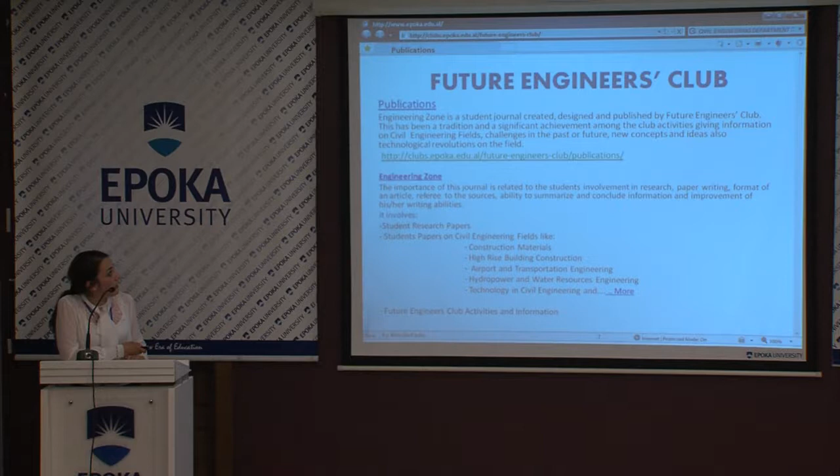Our club, as Professor Erjon said, was born with the university and the department. But we had a timeout, and we want to re-initiate it. Before, there were two other journals published. The first was the Engineering Zone, published in 2011, focused on the Millau Viaduct, the world's highest bridge. The Engineering Zone number 2, published on the 2nd of May 2011, concludes more about Albania, making the first move of Albania today, Albania tomorrow.

The one you're holding in your hands is Engineering Zone number 3. We tried to focus on every single aspect of civil engineering, with our main focus on hydropower and energy engineering, which is the Hoover Dam, a concrete masterpiece.

These are parts from the Civil Engineering Zone number 1. I'll show you what we include: bridge structure, student papers, and this is what I expect from each member. All of you who have papers and want to publish, please send them. I'm going to tell you the contacts.

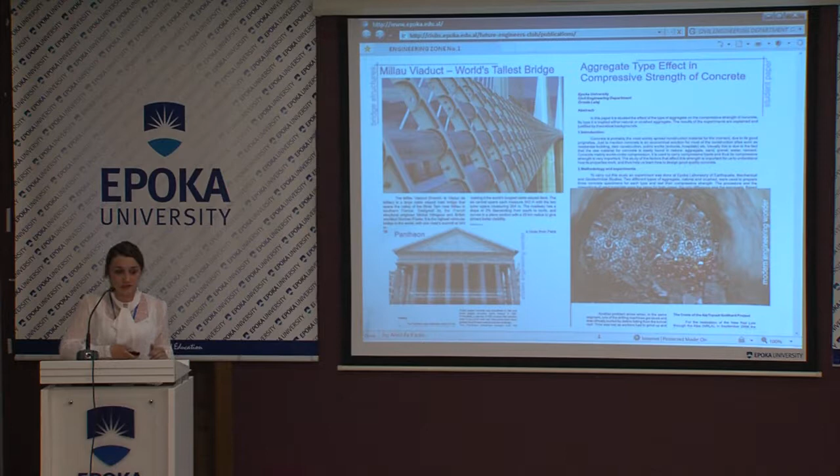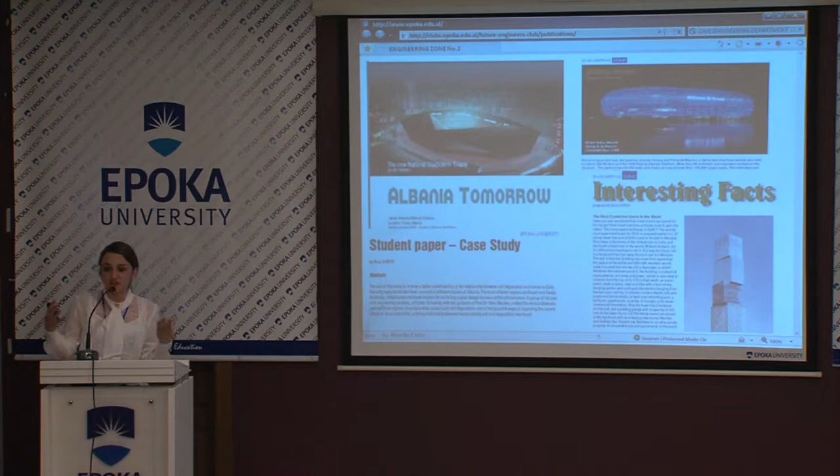This is the Engineering Zone number 1, and these are parts from Engineering Zone number 2, which included more about Albania, Albania tomorrow, a student paper case study, interesting facts about the civil engineering world and technologies involved, and also stadiums—everyone loves football, right? So let's include something that makes you feel better, is funny, and also teaches you about engineering.

The one you're holding is the third one. This is the cover, here are the contents. In this number you will find ancient engineering. Sometimes each of us, even human beings, need to know where they have been, to know where they are, and where they're going. So what about ancient engineering?

We took the example of Pont du Gard, the Roman Empire's strongest masterpiece. After that we had the bridge structure—this bridge is very beautiful because it's Europe's largest water bridge. So on the bridge there are not only human paths, cars and automobiles, but also boats, rivers and water. So how to achieve this? This is also very important.

Transportation engineering—we want to spread out transportation. How is it implemented in the world? Why is it so important? In Albania, maybe it's needed, but it's not given the right attention. So what about this one?

We also included Kansai International Airport, an airport built in the sea on an artificial island. In Japan there are earthquakes, right? So how did engineers manage this one? And the world's best airports, according to Airports Council International—maybe you would like to check out who those airports are.

Which are these airports? Tunnel engineering, where tunnels are becoming even more important. We included the largest tunnel—it's in Norway, the world's largest tunnel, 24.5 kilometers, taking first place for the world's largest tunnel. Also, we have the Channel Tunnel, the masterpiece of Europe, let's just say.

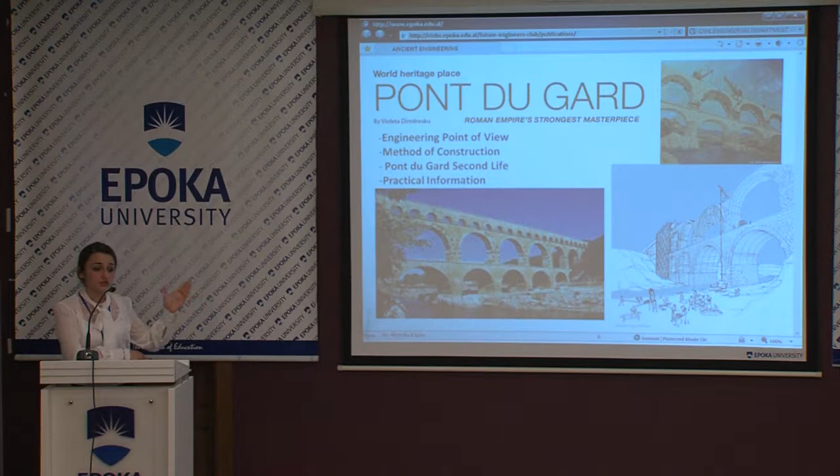As I said, we have the Pont du Gard. It is seen from the engineering point of view, the method of construction, Pont du Gard Second Life, and practical information that you will find in the magazine.

After that, as I said, the Magdeburg water bridge is Europe's largest water bridge. You will see the technical specifications, some of them, how it is used, how it has been built, what is incorporated in it. Also, Kansai International Airport is an airport built in the sea.

Well, it looks like they had no terrain to build an airport, so a new idea: let's build it on an island, an artificial island. This is one of the largest airports in Japan, and one of the largest in the world.

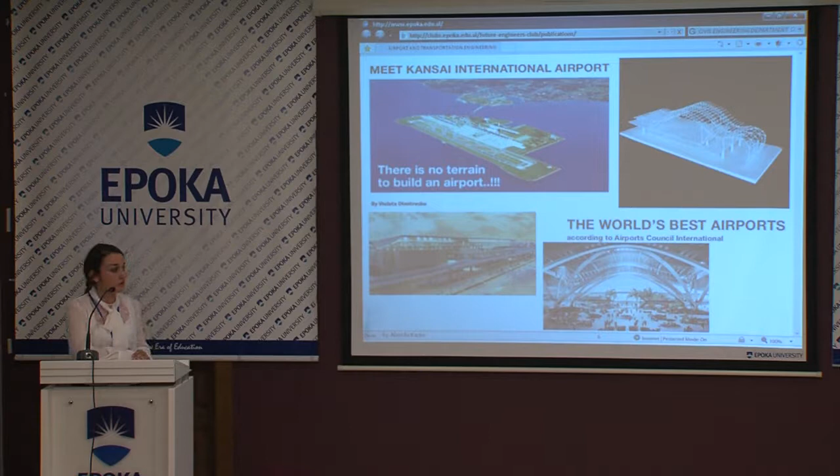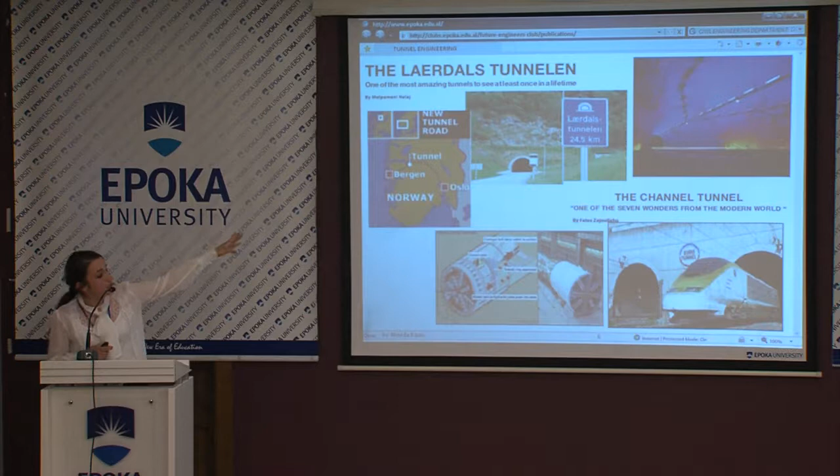After that is the largest tunnel, one of the longest tunnels in the world, and one of the best tunnels having the best air condition among its environment in the whole world. So what about this challenge? As you see, Bergen city and Oslo have been merged, or incorporated, using this tunnel. How about it? We wanted to explain or show how much you can benefit from it.

After that, we have the Hoover Dam. As I said, it is all built of concrete, a concrete masterpiece. You will find how difficult it was, but also some management tricks. The manager of this one scheduled and finished it 2 years before the deadline, which is crazy, but it happened. So how did this happen? We explained all of it.

And after that, we wanted to include something very important for the Balkan part and also for Albania. We had the pleasure of having engineer Andi Dukain here to explain the Trans Adriatic Pipeline, and I wanted to include all the information in the engineering zone.

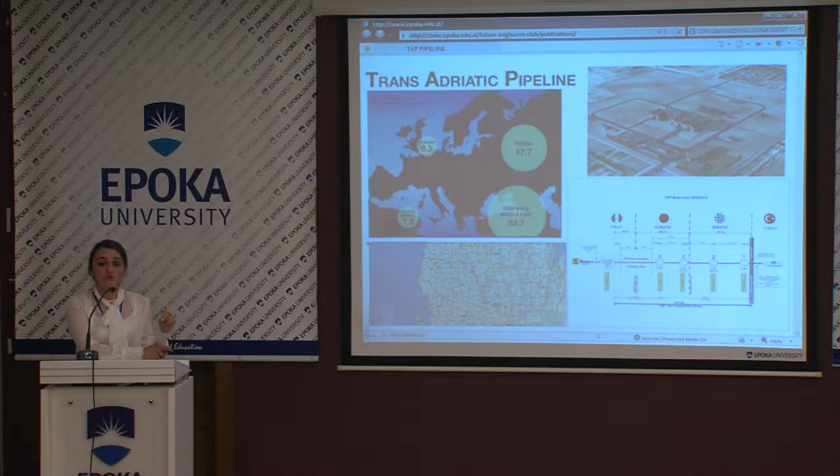Also, you will find another student paper, Recycling of Concrete. It's very important for us not only to show student papers and research, but also how to use references, how to cite sources. This is very important. In this case, we are also fighting against plagiarizing.

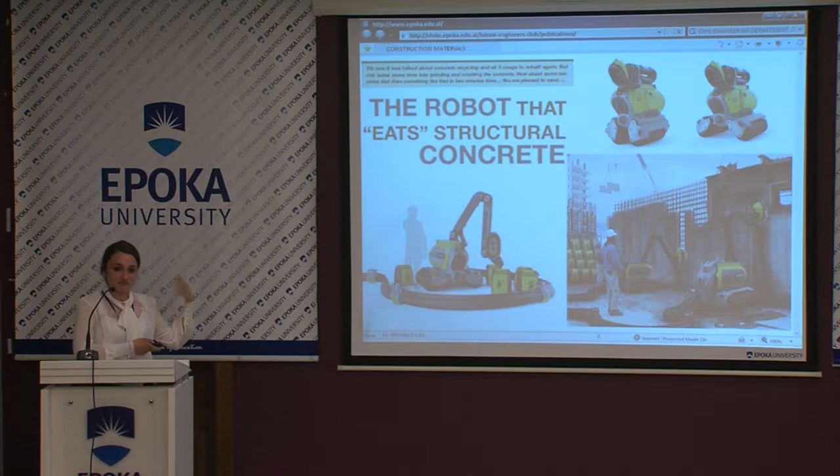After that, you will have construction materials. These, I must say, are research made by students. All of this is research made by students. You will find a few examples which are taken or summarized.

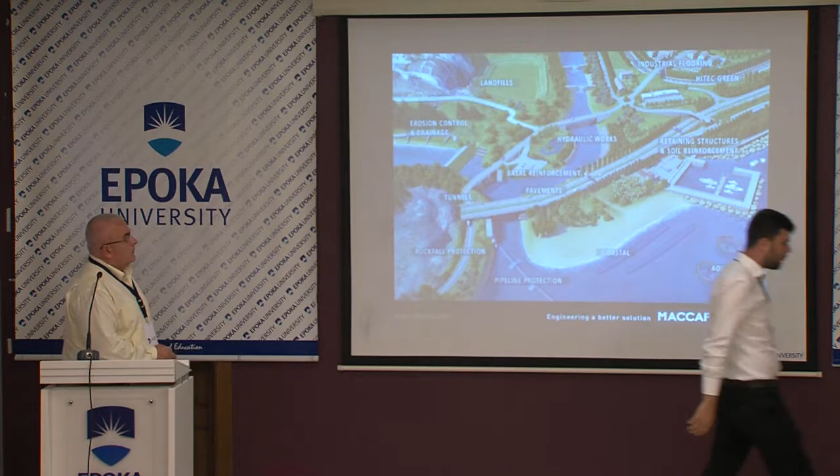I hope... the right one or the left one? The right one. Okay, so actually Maccaferri Group is a worldwide distributed group, specialized for geotechnical products, in particular for environmental solutions.

Our motto is very simple, let's say, well familiar and so well fitting with your motto, which is 'engineering a better future' - 'engineering a better solution' is ours. For you as young engineers, you have to have the challenge to engineer a better solution, also as we do.

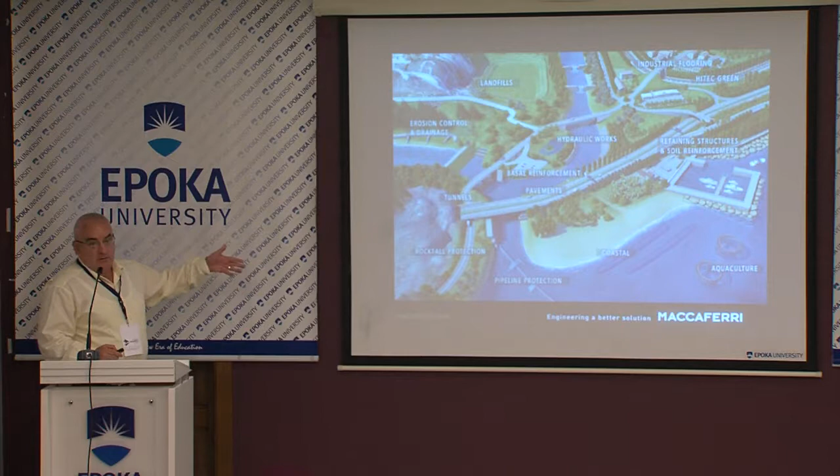Actually, we are distributed in many solutions, as you can see. So landfills, I'm starting with the latest step, because landfills is the challenge for the future of the country. We are living in Albania, and we see that the environment is one of the most problematic issues, because we have a beautiful country, but we have less attention to protect this beauty. At the same time, we have to think about recycling, as I heard here that you have already made some investigation on recycling. And landfills are very important for us, to be designed to be also supplied by our materials.

Of course, one of the problematics that you can hear frequently is erosion control. Erosion control is one of the most important issues, actually, knowing and having consideration of the geology of the country. Albania has a very specific situation for geology, having very common views and cases with the other part, which is Italy, South Italy specifically, and surrounding countries.

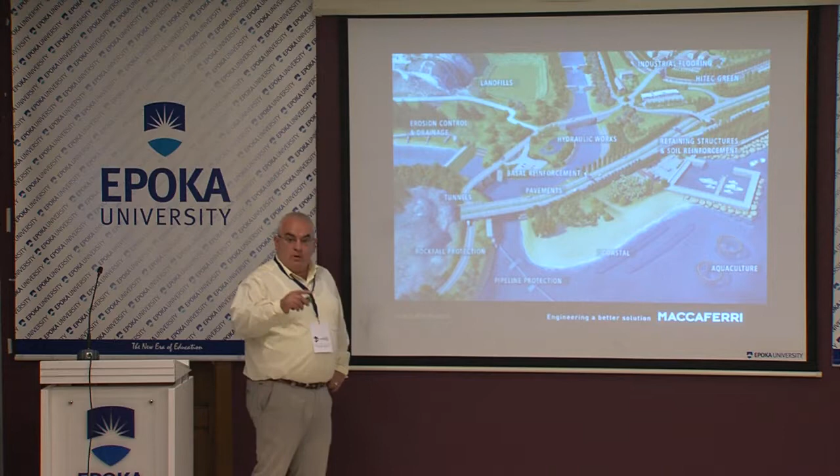For the pipelines, it's the new issue that we have to see for the future. In specific case, we have the new pipeline of gas passing through Albania, which is the TAP project. And with the TAP project, I think we have the case to work together and also to explain our materials together.

Of course, to give a solution is important, but on the other hand, you need materials that you will be able to test, verify, and prove to convince the market. This is a very important issue, because you are engineers. Maybe you are already starting to produce papers, to design something, to put your ideas forward. But the important thing is to test what you are designing, what you are suggesting. So behind all the solutions, there are materials and there are tests.

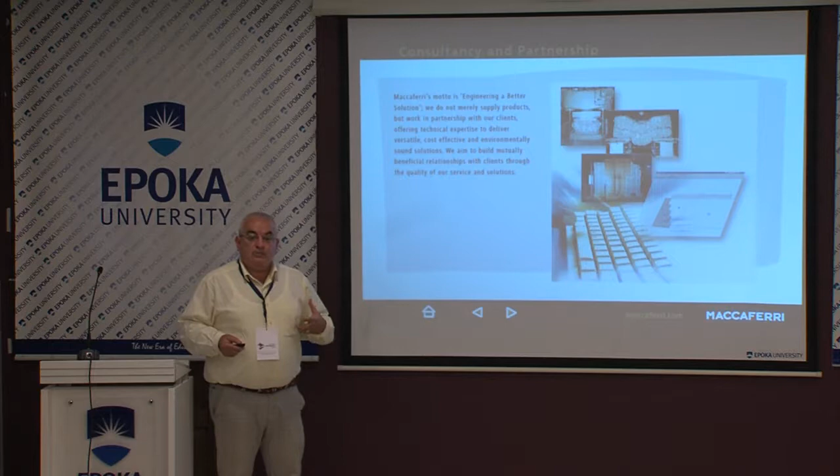Of course, developing solutions, you must also develop the software, making this solution accessible to everybody, to every engineer. The basic product is the gabion. Basic, I mean the oldest one.

Gabion is used with the meaning of a cage filled by natural materials since Roman times. At that time steel itself did not exist, but they were using ropes or environmental materials to create cages, just to use in nature to prevent sliding areas and also to create embankments, according to the situation at that time.

But Maccaferri was the pioneer to develop this old idea, bringing it through history from Roman times to a modern product made of steel, which is very high quality steel, and also elaborated and protected against corrosion, which is very important for the long lasting of the product.

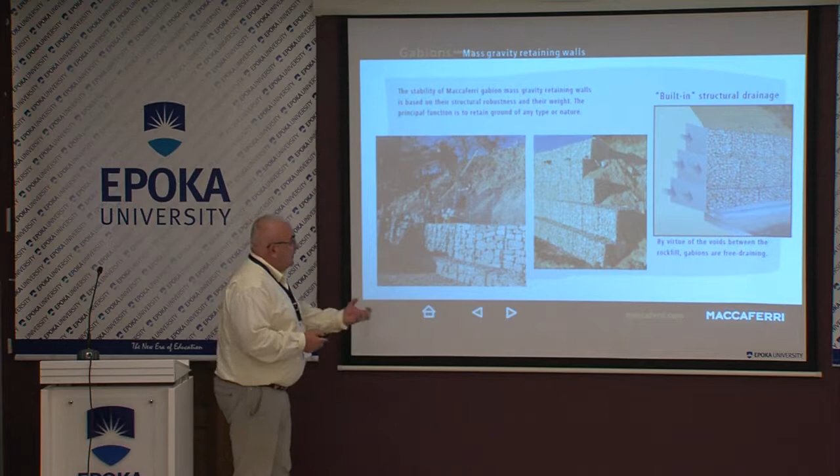Anyway, I don't want to take more time, because I think it is foreseen that after this workshop there will be a kind of exhibition showing how a gabion is made, how it will be filled, and how it will be constructed. Two workers are coming from our side to show you, to make it possible to have a real impact on this product.

I said that it's important to have the solution from an engineering point of view, but also to have a full and deep study about the materials. Materials have to be at the maximum level that science can achieve in the current situation. So actually we are developing raw materials based on the conditions where they are applied.

For instance, the raw material we use is steel wire. It is made of steel having a balance between three characteristics: to be plastic enough to be elaborated, to have the right resistance and strength when forces are applied to the structure, and at the same time to be elastic enough to have the flexibility needed so the structure does not break down.

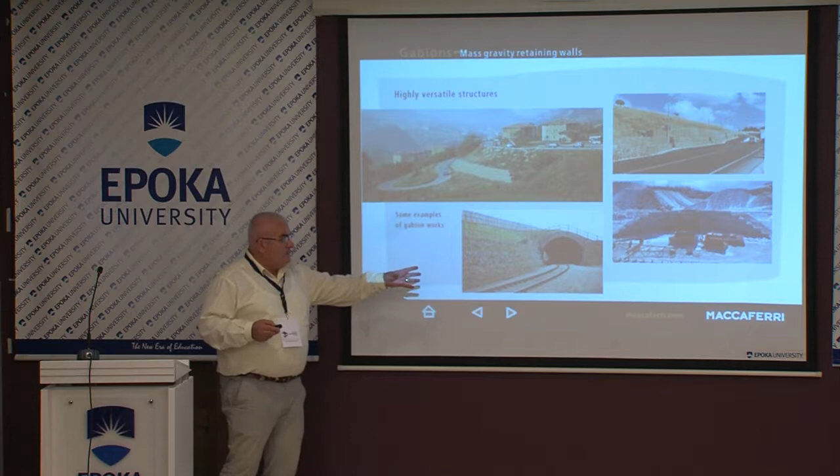So as you can see, gabions can be used almost everywhere in the environment: in infrastructure, in river protection, in railways, in roads, also in retaining walls, having on top a very important structure like a building.

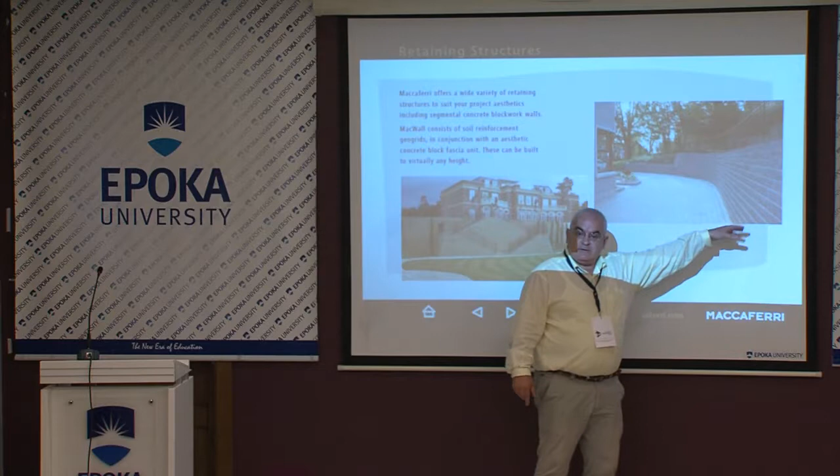We have later on developed structures that can fit with architectural solutions, because on one hand you use them for infrastructure, but it's also important to make your living area nice. Just a few days ago, I saw a documentary on German TV where a German family was shown building such a wall inside their house - they purchased these cages, these gabions, on the market.

You are very privileged because you have the factory just a few hundred meters away from here, so you can buy a few cages. You can do it yourself, for fun, in your home. And in Germany, I verified, because I worked there for a few years, that it is really fun to do something.

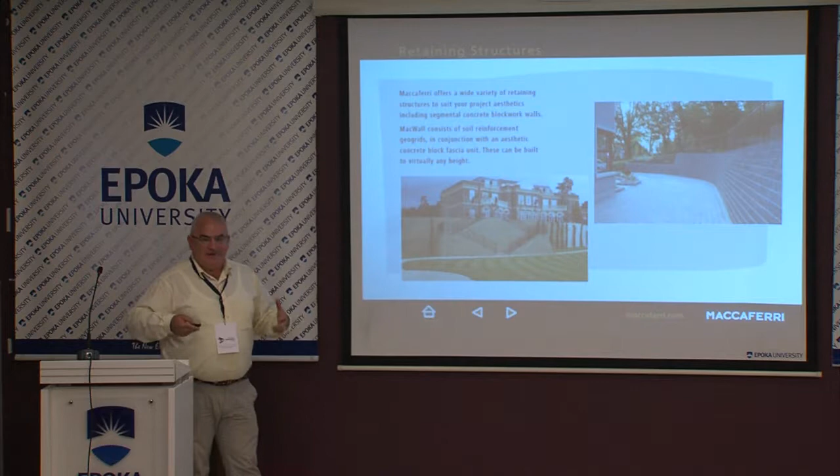In specific cases, engineers, young and old, like to do something in their garden, their house, their environment, their neighborhood. This makes their weekends or days off exciting. This is a way you treat not only your knowledge but also your free time.

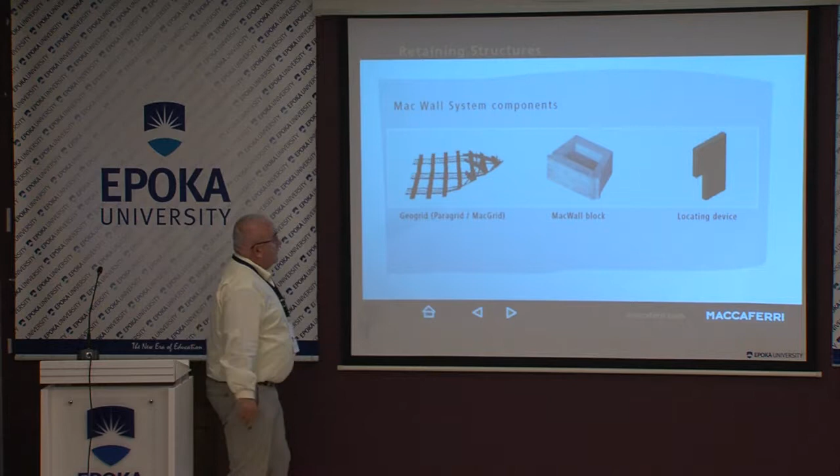Of course, the conditions of construction change over time, and more specific inquiries need to be solved, meaning retaining structures not only by simple gabions but combined with reinforcement. At this point, the idea was developed to have structures where gabions are used in the front, and reinforcement on the backside, respecting the environment by reusing materials available at the site.

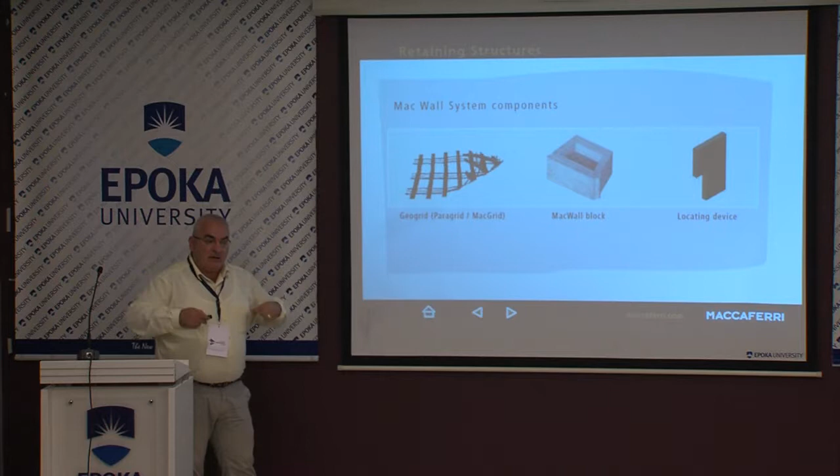So you excavate. If you have good material, you keep it on site, and when you construct, instead of using other materials, you reuse or recycle the material you have already excavated. This is the meaning of doing such kind of big structure.

I have friends who work on site. We fight on site, you know, with these kinds of structures, like 40-meter high retaining structures. That was something amazing, also in Europe, but we have done it here in Albania. These are made by a reinforcement soil system, which contains the Terramesh, our developed product, plus the geogrids on the backside.

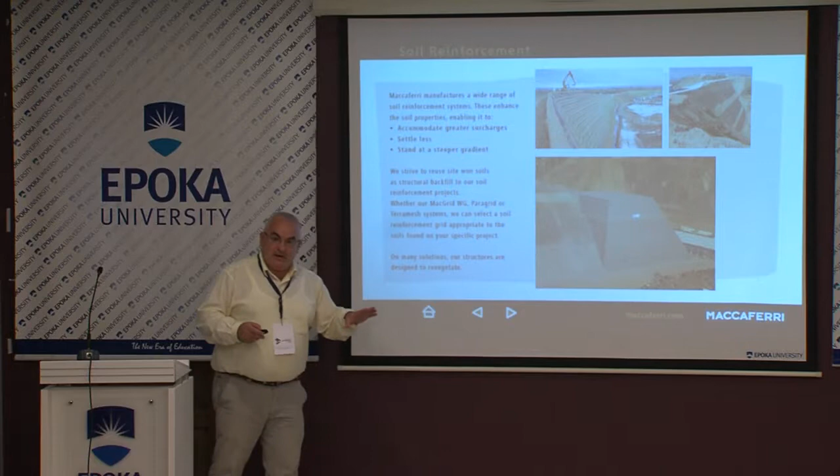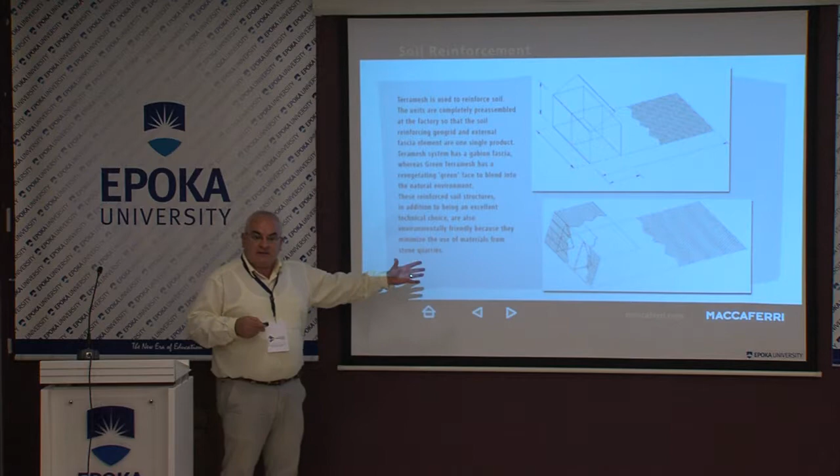Of course, this is a combined solution, and you need as a backup not only the design, not only the product, but also this knowledge distributed to all engineers, to be, as the Italians say, 'pane quotidiano', the daily bread for every engineer. It's important that everyone has access to the right software, not only for testing but for constructing, designing a structure like that, and dimensioning it.

You can see we have colleagues here who participated in this construction. This is in Albania, about 39-40 meters high. And this one is in Greece. We worked in cooperation with Aktor, already established in the market, and we're still working not only in Albania but all over the area: Serbia, Macedonia. Actually, we are involved in Qatar on a big project.

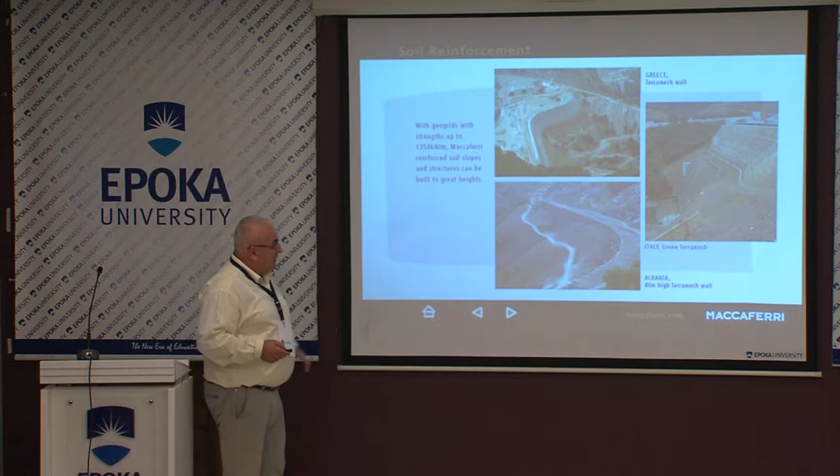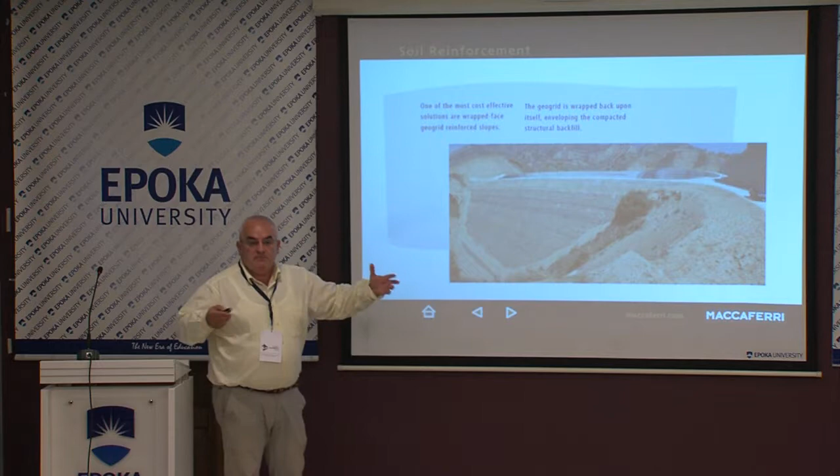Dams, you know - unbelievable to say that with these structures, soil reinforced structures, you can build big, high dams while respecting the environment. This is very important, by the way.

Also, reinforced soil can be used inside urban areas, using concrete as facing, in order to give a nice facade, while using compacted soil inside, reinforced by specific geogrids that we produce, to have a very long-lasting structure. Of course, you can choose the facing according to your city's urban development, and all of this is developed by us.

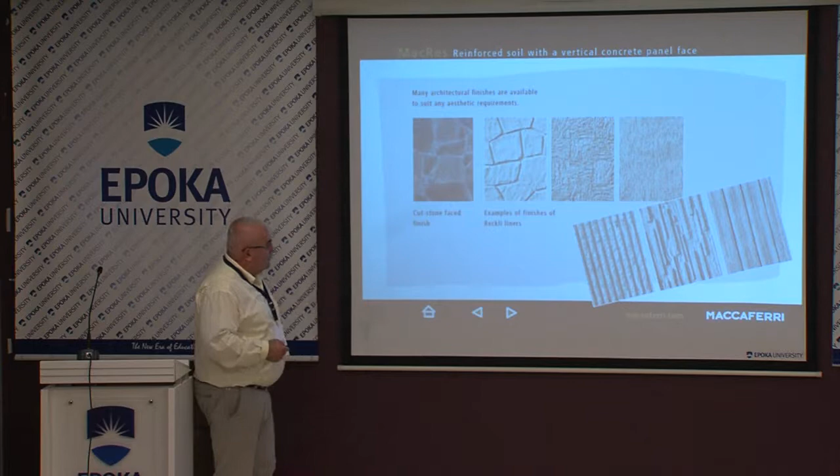We give the molds to the client, and the client performs the production of the facing. Of course, this is a solution combined not only with geometric forms but also function - what kind of function, is it a highway, is it going to be a bridge, whatever. So you have to adapt the solution according to your intention to construct.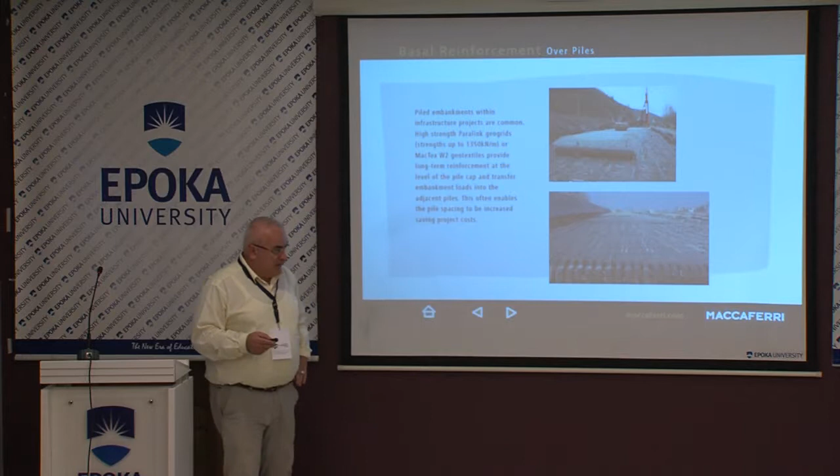So, geogrids. You can see geogrids arrive at our factories produced at values of 1,350 kilonewtons. I don't know how familiar you are with geogrids, but our competitors, like Huesker, a very respectable company in Germany, stop around the value of 1,000 kilonewtons.

We already have in our production range 1,350, which is registered, proven, and certified, and we use these geogrids for a new airport in Ireland - basal reinforcement of the new airport. This means the product is going to be developed as time passes. Using geogrids is not an old practice; it's just a matter of 20 to 30 years, and geogrids are going to be used more widely.

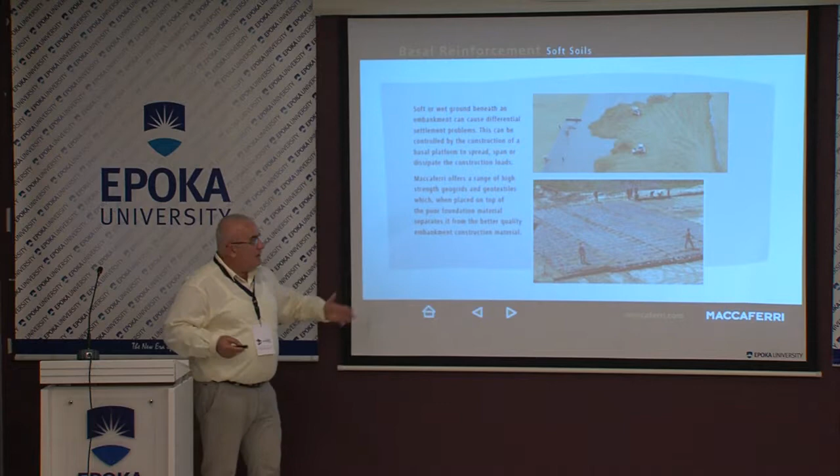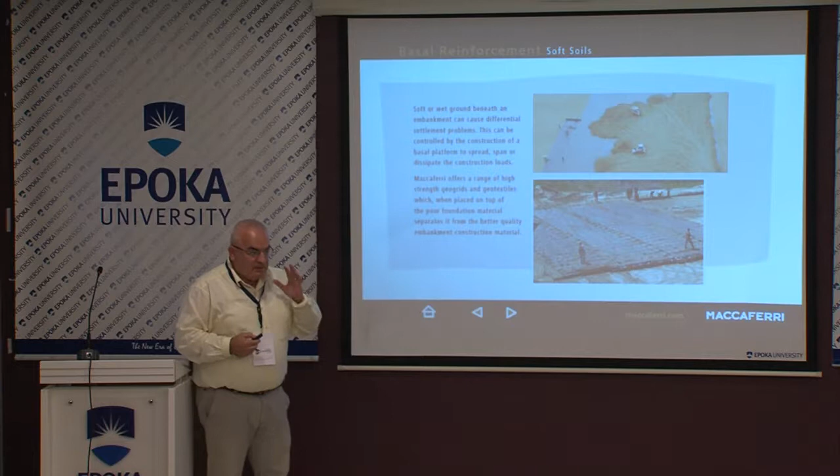The huge embankments in the infrastructure cannot be afforded financially or by time, meaning also the cost on the environment. Have you heard of the carbon footprint effect? This is important because some analyses are made according to how much transport is done for one product of construction. So much the transport is involved, so much the environment is damaged.

Now we have a cooperation also to develop a hydropower project. I have colleagues that work quite well in very specific and difficult conditions. Bechtel also worked in very particular conditions, using the excavated materials to recycle and use as filling material for these big embankments.

Also using the opportunity to spend less time. This is very important, time now actually means money. Don't forget, your families are going to invest in you here for your studies, but don't forget the time. For you, it's not time to be spent, it's time to be used.

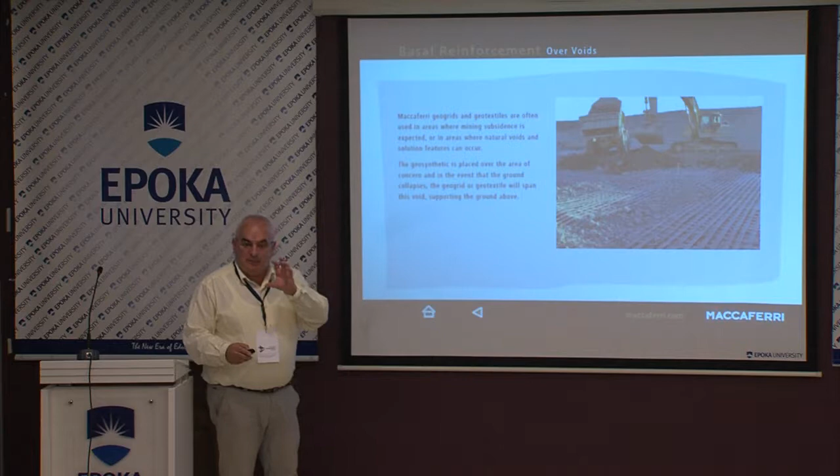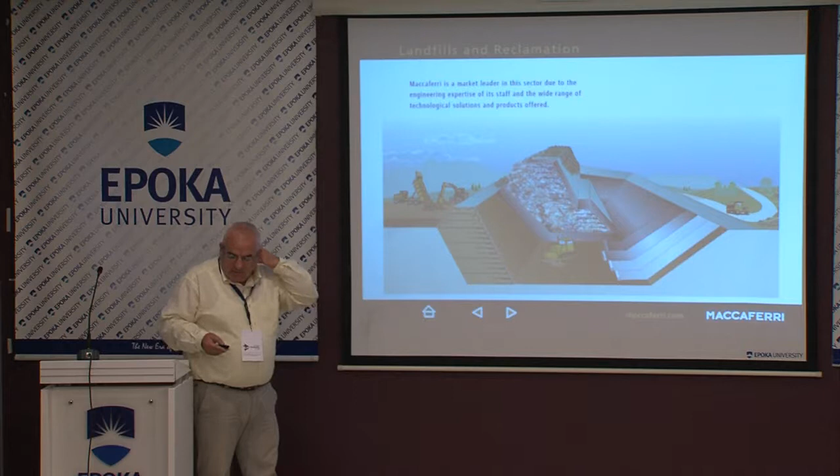I told at the beginning that now we are working very hard in Europe, all Europe, especially in the candidate countries for Europe like Montenegro and Serbia, for the landfills. Fortunately here there are some efforts but not yet done properly. Probably we hope after having this new status of candidate, things will get improved.

Of course this kind of structure needs earthworks for sure, needs reinforcement of the structure for sure, and needs to have a clean environment at the end. So you use it, and after you don't destroy the environment.

You see there are a lot of products. All these products for landfills are designed, produced, and tested by us. Of course we need cooperation with university. I was talking with Professor Hussein that we should soon take steps towards doing testing in your university, to involve also students, not only professors, in testing.

Also our R&D department will start to study some new materials through your university, just to cooperate better on this point. I think it will be a benefit also for the students, for sure.

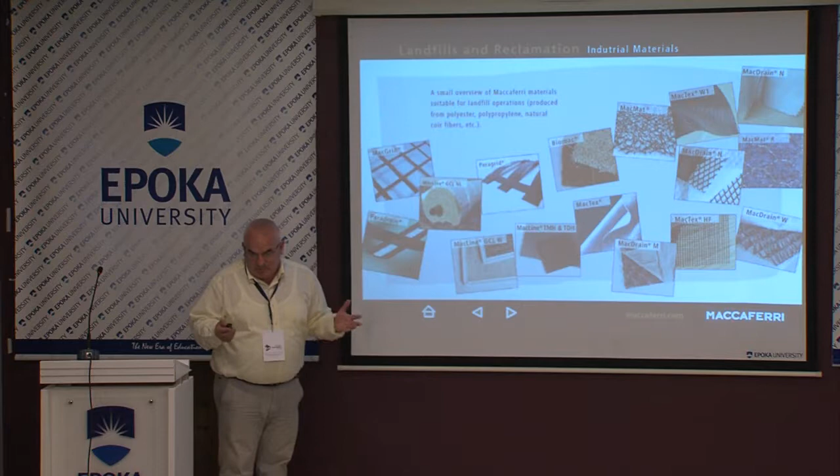So these are the layers that we use, and you can see a lot of materials involved. One of the most important things is rockfall protection. Rockfall protection is a matter of not just protecting environment, not just protecting infrastructure, but protecting human lives.

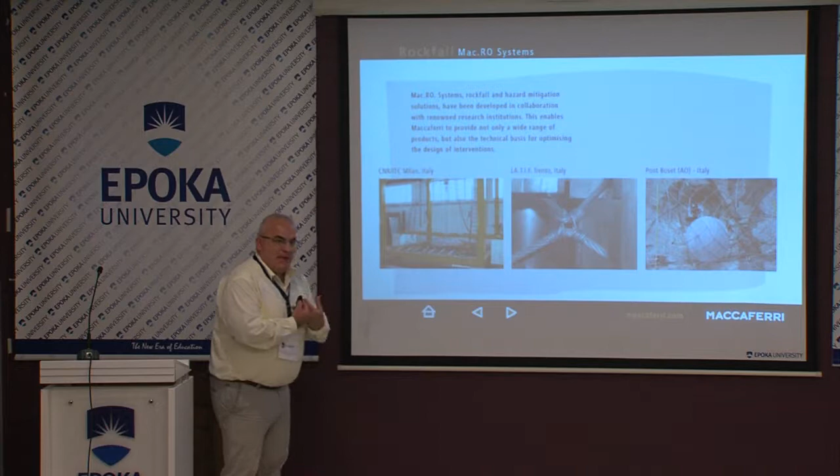We are so much, I'm talking about Albania, not attentive to the fact that on the roads we pass, the slopes are not protected. I'm not saying at all, but if there are cases that are protected, they're not 100% sure. So for you, as new engineers, please consider life very important when you design. The life of a passenger or a car passing through, a bus passing through, very important. You have to take care of the rockfall.

The rockfall is, as you can see, in different classes. After this I'll leave the presentation also to share with you, so you can see in detail. I don't want to go into the lot of materials that we produce. We are second worldwide, because the first is a Swiss company, just telling you openly.

Maccaferri started just 10 years ago. But as an idea, as a design, that is important. We started before the Swiss company, Geobrugg. The Swiss company used our ideas on designing and developed the products, started to be the pioneer on the products.

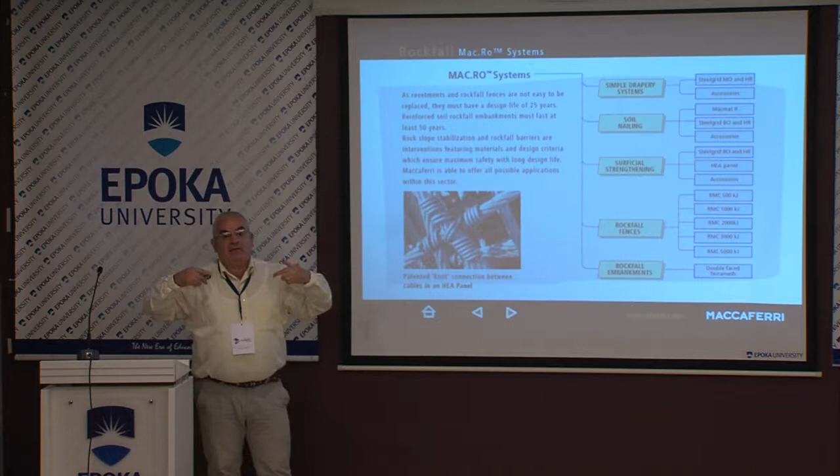So it's important for you too, not only to design. When you do a product, you have to think, from a design point of view, also about the way and the materials you have to use to implement that product, that design you have to do. So after that, we developed a lot from our old idea, keeping in mind that this is not only a matter of engineering, but a matter of need.

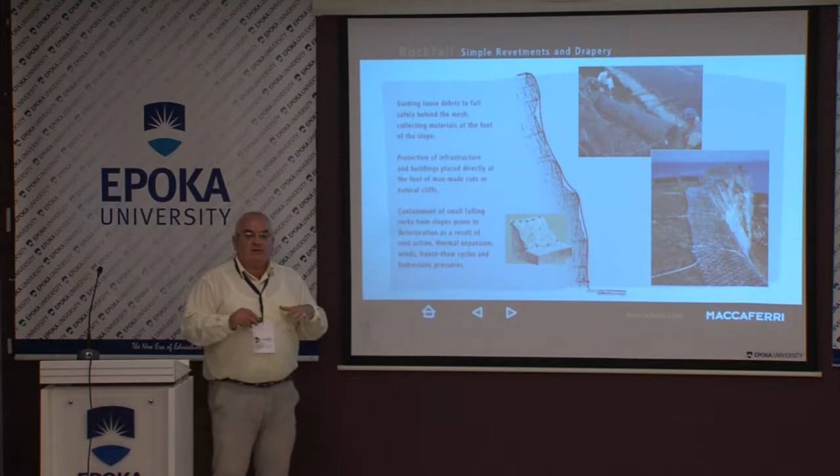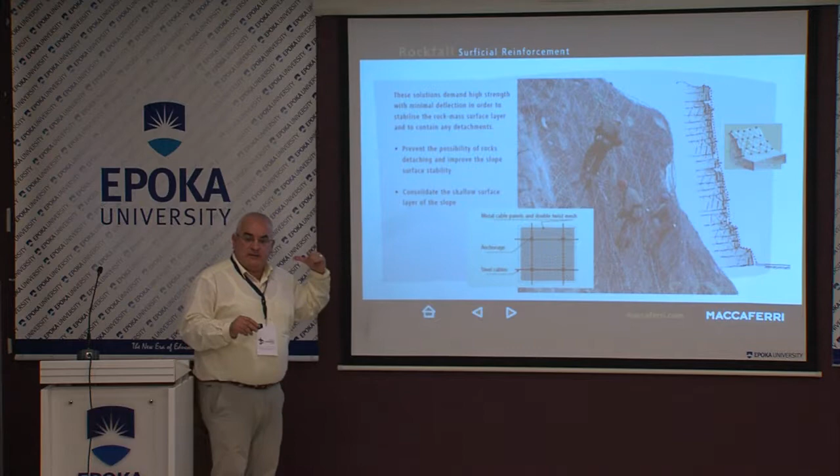Having two companies, one Austrian also, cannot cover all the needs for materials worldwide, because we work in all the countries all over the world. We have around 60 companies producing, which is not a small number of factories. We ourselves produce this material in our facility in Maccaferri Balkans here in Tirana, which is a new factory made just 3.5 years ago.

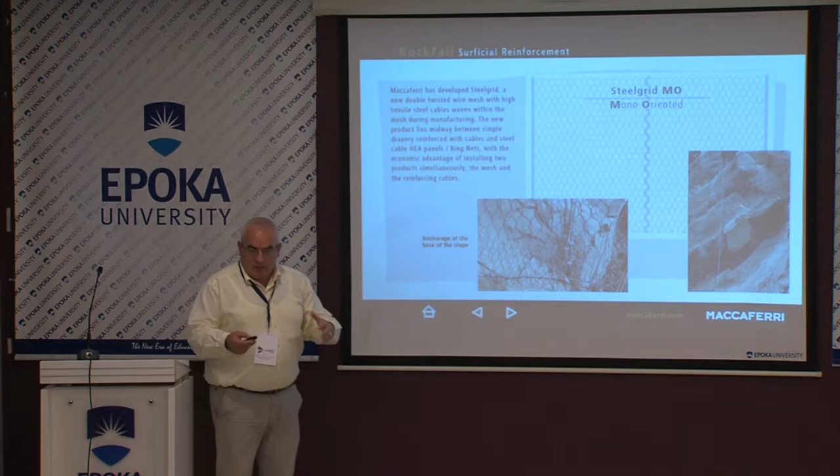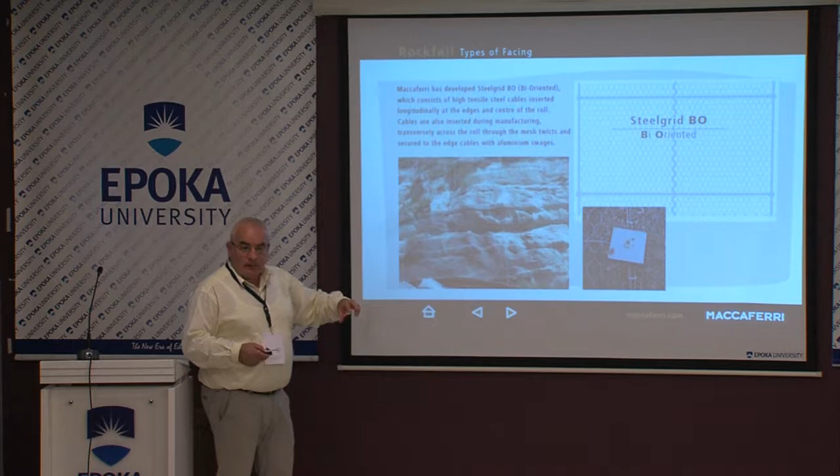So you can come to see also the production. You can come with Professor Hussein and Professor Yavuz. We can organize special visits for you to see the production, not only designing whatever - you can come and see what is going on with this kind of material. We have symmetric and not symmetric reinforced netting for the rockfalls.

And we have high energy absorbance panels, which are the latest development. You can see that also with the barriers, we arrive up to - and it's important to say that these products are developed through Politecnico di Torino, which means university is important when you develop a new product. It's important because university can verify, can study carefully all the elements. We can give the idea with university together, we can design, we can calculate.

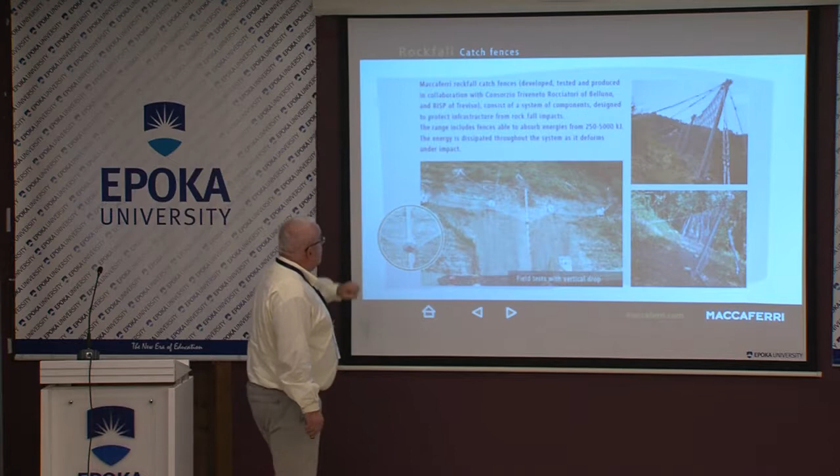And this is a testing area in Belluno. We used to do our tests for all the rockfall materials. You can see the last one - we have a company specialized, Consorzio Triveneto Rocciatori in Belluno. We do our tests, and at the same time we arrive every year to improve the level of absorbance, energy absorbance. We arrive up to now to test a 10,000 kilojoule barrier.

You can imagine a full truck, a big truck, loaded, can go through the barrier and can stay over there. You can imagine, just to see what is the top level actually developed and also registered - it is available. So a full truck can run through up to the barrier point and the barrier can stop it.

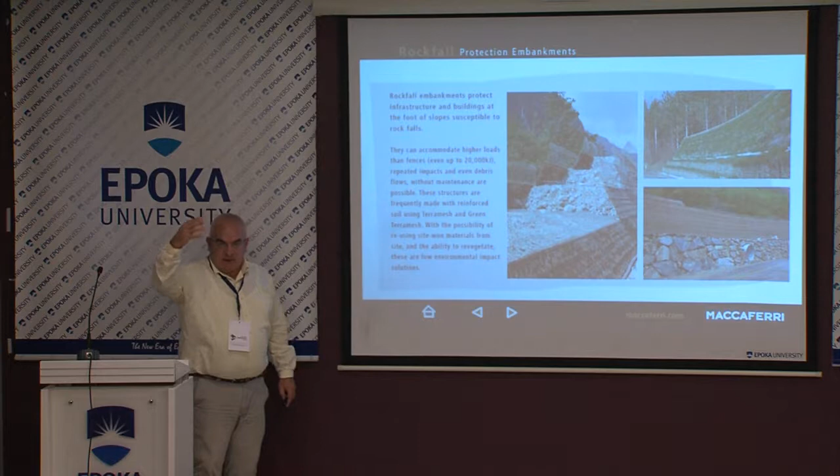So there are different systems, different cases that we have to use. Also important to use, in specific, this is a product which comes through a bad experience. This is coming, let's say, a new point of view for you. There are two ways that you do designing. You do designing because you have studied a lot, you have learned a lot through your professor, through your studies, and you develop something - a new design, a new project, a new product. And there are also cases, unfortunately, that you design because something bad happened. This is the case.

As you can see, we made embankments of 20,000 kilojoule, meaning 2 trucks loaded full can go through these barriers, can crash and can stay over there. This is because in Valle d'Aosta there was a village destroyed totally because of a sliding area, a big sliding area, which destroyed everything, killed everything which was inside of the houses over there. After that, it was somehow forced the idea to make some barriers in order that this village could be rebuilt again. So it was done, so-called duna protection.

Duna protection, this is with soil reinforced system. In concrete cases, called Green Terramesh system. Green Terramesh is going to be used also by backfilling, by reinforcement inside, and also having hydroseeding on the facing and having a green impact from outside looking. Not just only concrete - I don't have anything against concrete, by the way. I respect the professors doing research with concrete a lot. I respect it, because our products have to do with concrete too, in the urbanistic area.

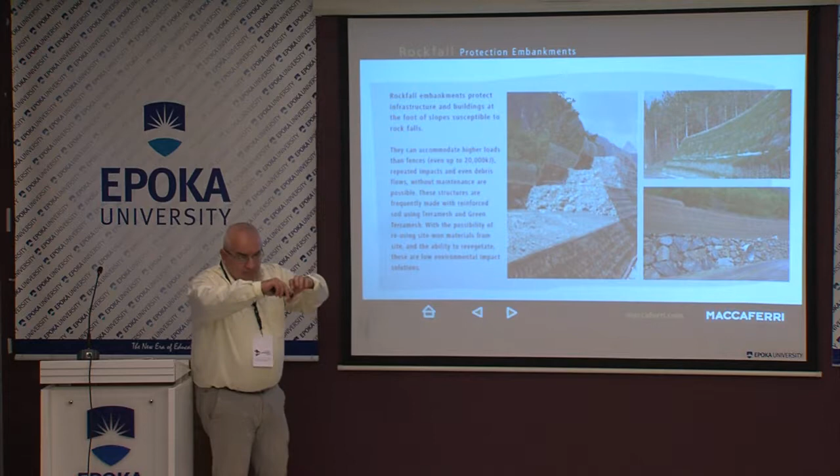Of course, inside the city, as I said, everybody can use it for fun - in their garden, in the house, you know, you can use it for fun. Instead of making walls like that, small in the garden, you can use it to make a small structure filled by stones, natural stones. Okay.

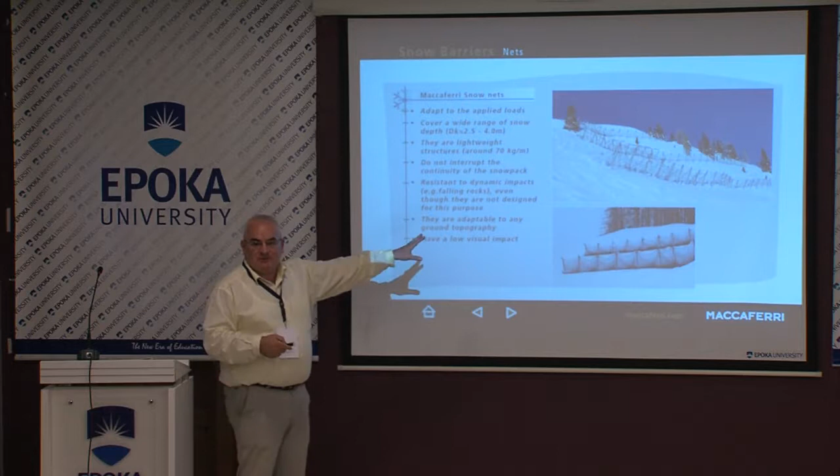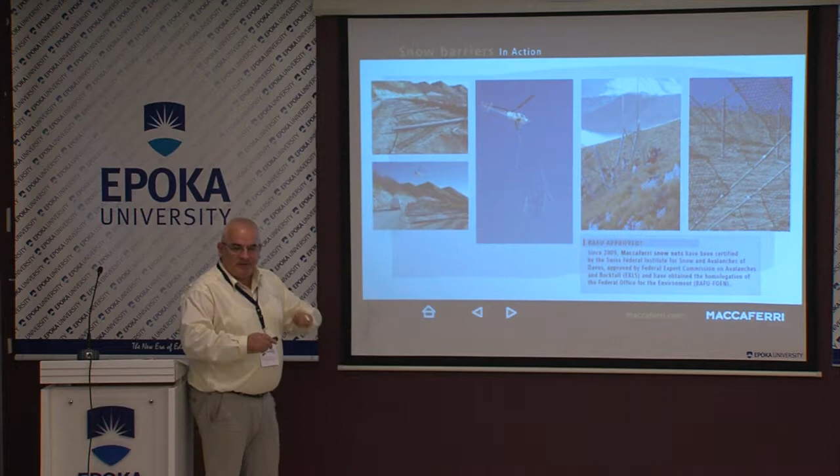This is the next future for us. Hopefully, for me, it is too far to arrive to have fencing in the top of the mountains against the snow, for snow protection. And you see that snow protection needs a lot of equipment. It's very expensive because helicopters have to bring the panels of the barriers, and it's a lot of work, very careful work, and needs a lot of money. When the touristic industry will go from the sea to the top of the mountain, we will be sure that there will be space to use also these products.

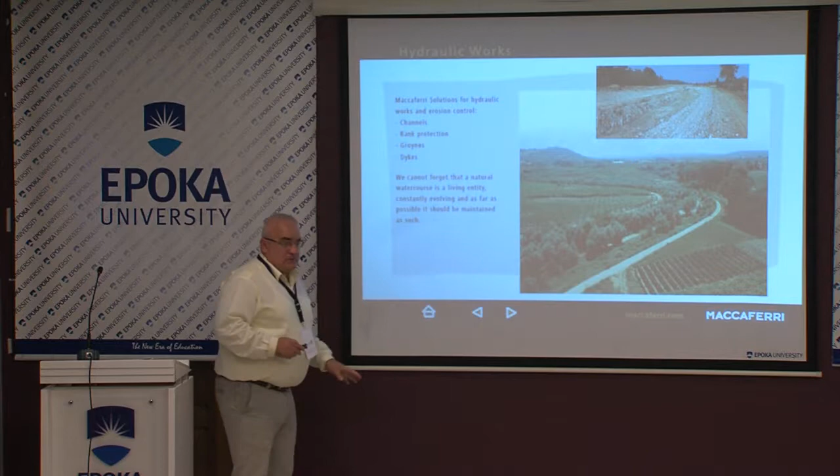Of course, I'll just stay on this for a while, very shortly. There is a product of ours called mattresses. If you browse in your research through the internet, you can find mattresses referred to by a name, Reno mattresses. Reno is a river close to Bologna, passing through Bologna, in fact. Our first project, 140 years ago, was done for the Reno River to protect against flooding, because it was generating a lot of flooding around and creating a lot of difficulties for the people, also for the agricultural development. So the first project was through our product, Reno mattresses, which is a very useful product for river training.

You can see a lot of other products used in the water, and to use the material in the water, you need to have right, properly elaborated materials.

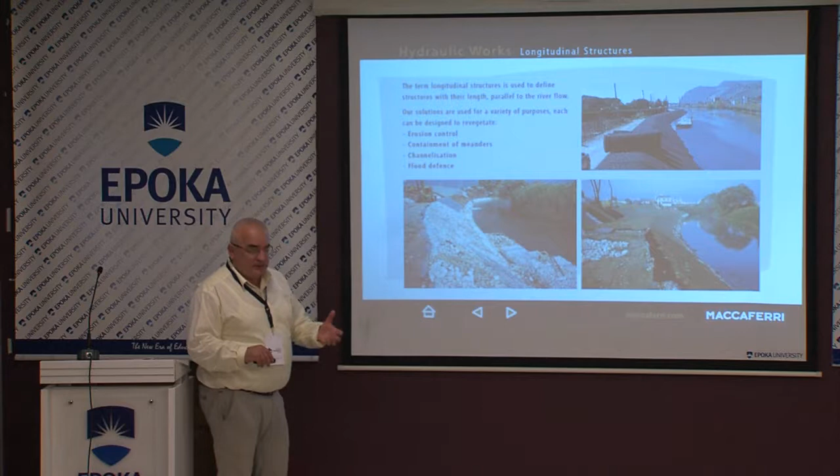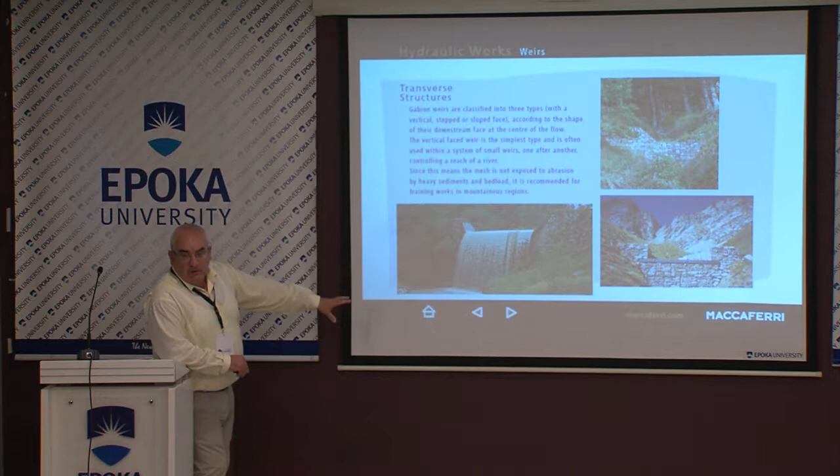A lot of examples: flooding emergencies. We have ready products in Europe, specifically also in the Balkans. We have in Croatia, also Serbia, very well equipped. They keep a stock with the gabions, because at the moment, for instance, I saw during the flooding in Serbia, they have ready sacks that they put the material in, they make the barriers against flooding. Here, not yet. We hope that in the near future you will do something in a better way. Also, the small torrent rivers, which are very dangerous when it starts to rain, in a very short time they become very aggressive.

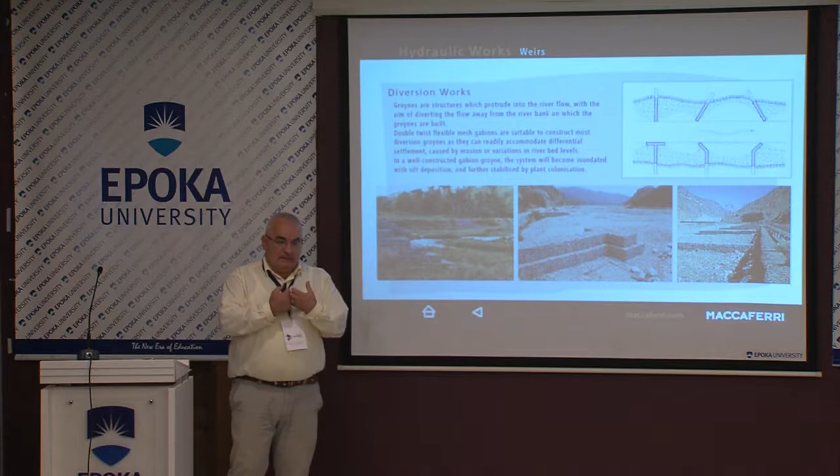Please refer to all this product. You can find all the calculation software for every kind of product, which is free. So you can visit www.maccaferri.com, Maccaferri with 2 C's like this, and 2 R's, and you can download everything that you need. All the software is updated continuously. We have a group of engineers and IT working on both sides to improve the products. Please, if you need help or assistance during your research or preparation of papers, please refer to us, okay?

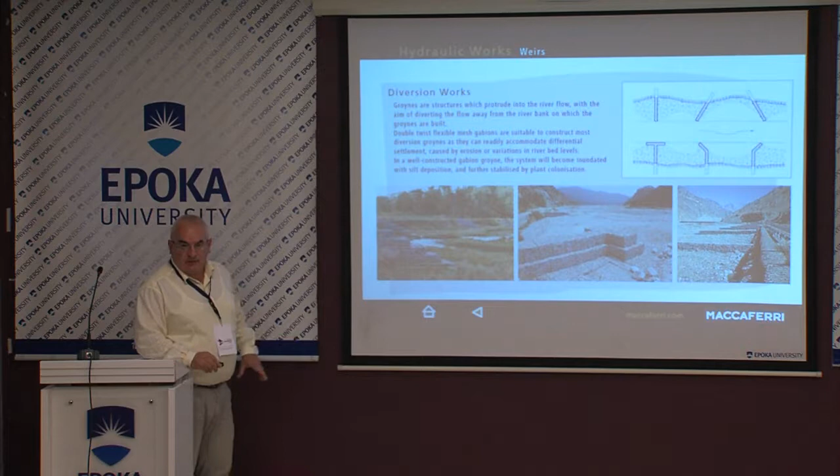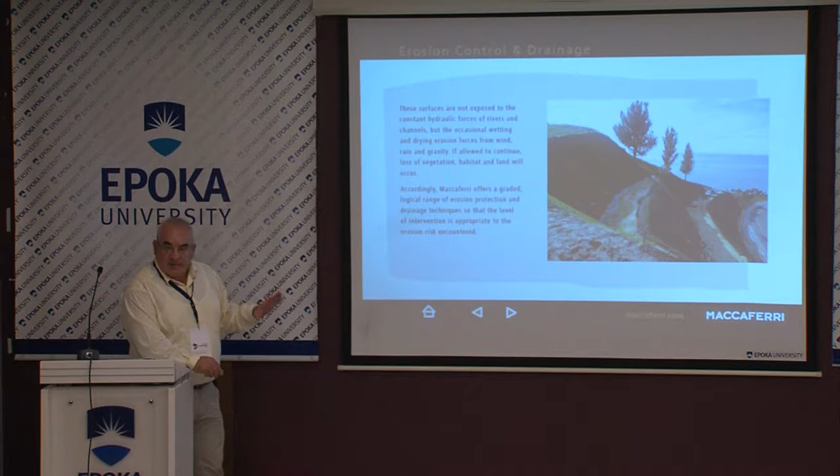Also, protection for erosion control is important. You can see that rocky slopes, and also slopes that can slide, can be eroded easily, specifically when you have done some works in the infrastructure. We have had cases, some problems we do have many times on the sites. Some of my colleagues are aware of the problems when you make an excavation, specifically when you have a clay structure, a poor geological structure, and after the rain comes it is very dangerous. Somebody has unfortunately lost their life, staying under these structures and not doing appropriate actions.

These actions, of course, need care, need specialized groups to be installed. Materials are all available from our side, but installation is also very important, by the way. Safety instructions are very important.

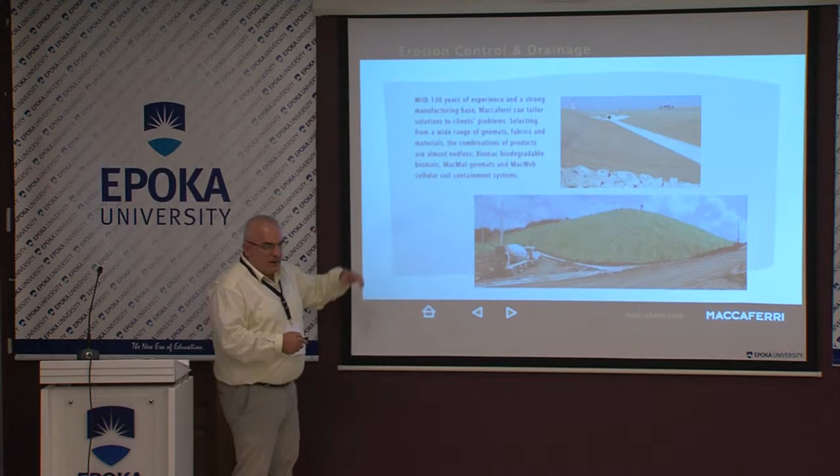So there are products also friendly in that point, that as time passes, they are going to be integrated. We call it biodegradable. As time passes, they become integrated with the slope. They are part of the slope, including also hydroseeding, which is also preferable. Especially civil engineers who are very friendly with the environment like to produce, and they sometimes go to the extreme using materials which are very friendly with the environment. This is one of the products that you can have fun to use. Also drainage systems in places where there is a lot of water and you need to drain them.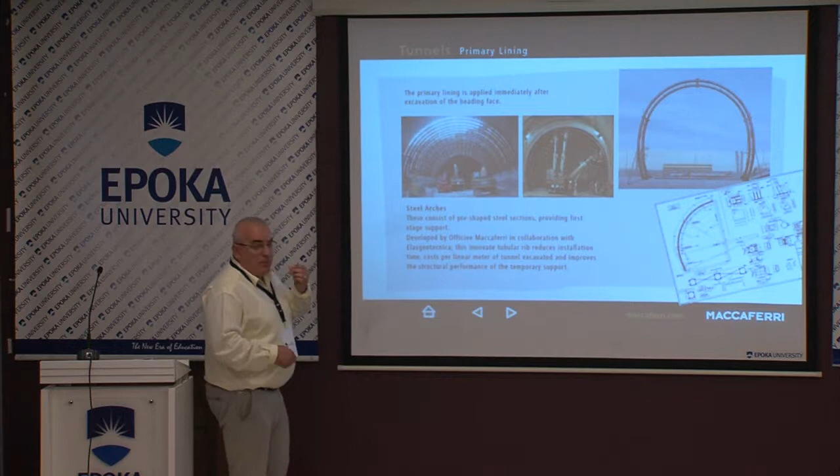Synthetic materials from geotextile, also drainage systems. We have this full range of products, and specifically we are developing for tunnels the tubular arches, usually used in tunnels as profiles, but tubular arches filled also by concrete.

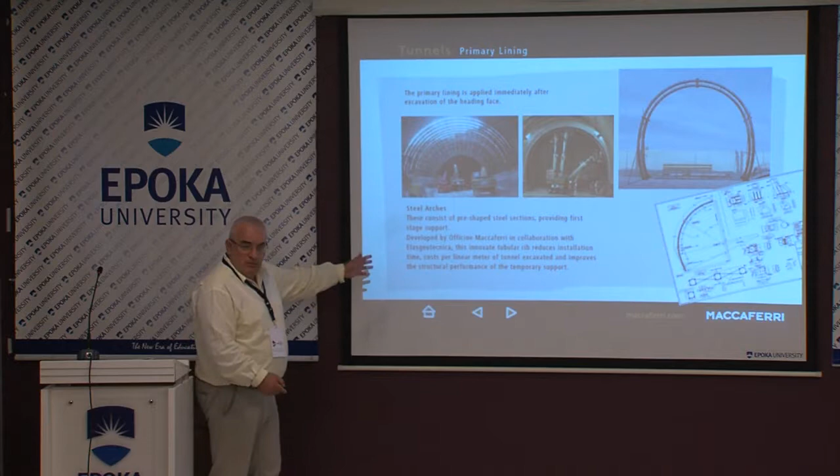They make the construction faster, they reduce the use of reinforcement inside the tunnel, and in the end it's a cheaper solution. This solution was just registered in Italy last year, so it's a new, updated product.

Also steel fibers, used for the shotcrete on the sides of the tunnel, together with the concrete. We have dosage machines that you can use together with the steel fibers. Of course, besides steel fibers, you use accelerating materials and solutions.

I don't know if you are specialized in tunneling, but there was a big accident in Monte Bianco. I don't know if you've heard of the tunnel. There was a big explosion after a big fire, high temperature. Many people died inside the tunnel. It was a tragedy. The structure fell down due to the temperature and because all the concrete exploded.

Now new materials and new norms require the sides of the tunnel to use fibers, and in the final lining to use PP fibers. PP fibers allow you to avoid big cracks and prevent the concrete from being destroyed.

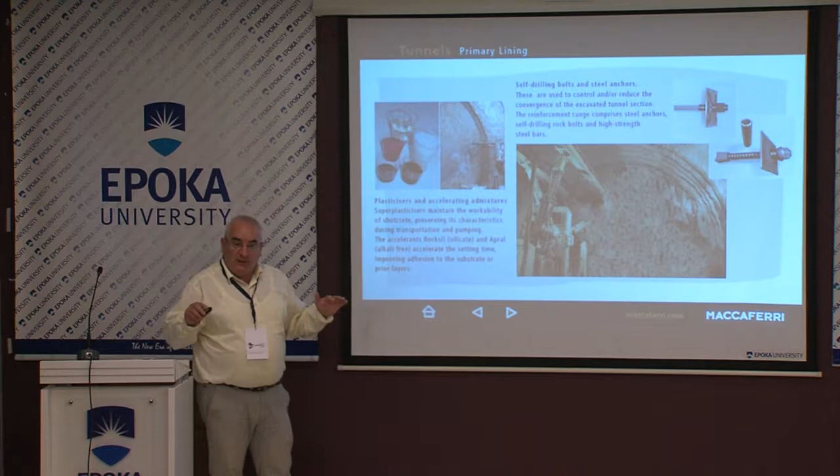Another point, I don't want to take more of your time - it's facing reinforcement by fiberglass anchoring. There is temporary reinforcement, because there's also permanent reinforcement through the perimeter of the tunnel. On the front face, when you have very bad geological structure that doesn't allow you to advance according to your plan, it creates a lot of difficulties and is very risky for the workers at the front.

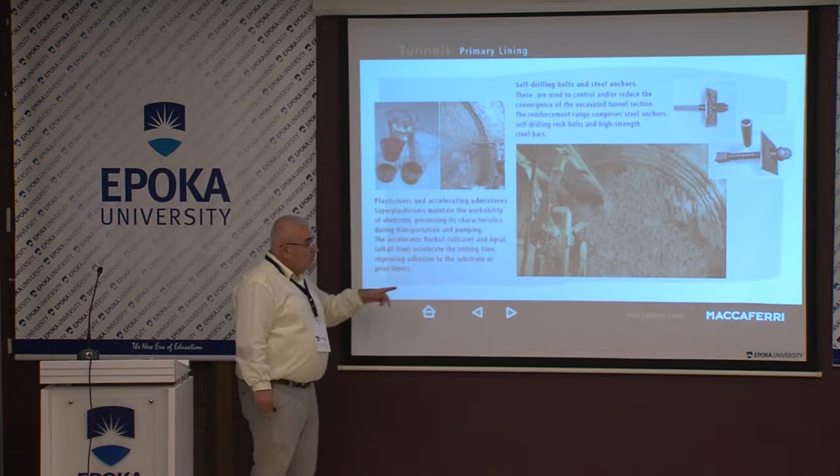So you use temporary reinforcement. There are anchors produced as tubes with a certain wall thickness, prepared with glass fibers. You can drill, put in these anchors, and be sure to advance without damage, without any accident.

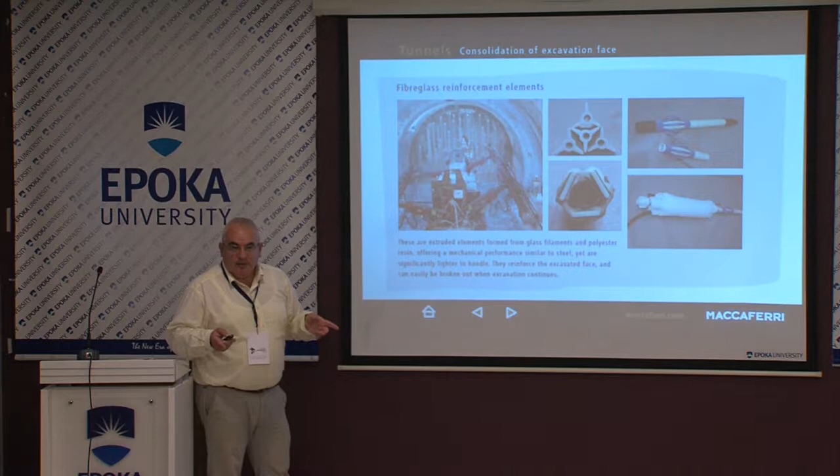I don't know if it's okay - this is a common area with the concrete. We also produce prefabricated concrete elements, which you see used for tunnels. This is important. And also asphalt reinforcement - this is a new product.

Thank God, this product is now produced in Albania recently with the new line we have installed. We export much more than we use in Albania. This is another problem - for us as a company it's good because we sell and export, but it's not good that this reinforcement product isn't used in our own country.

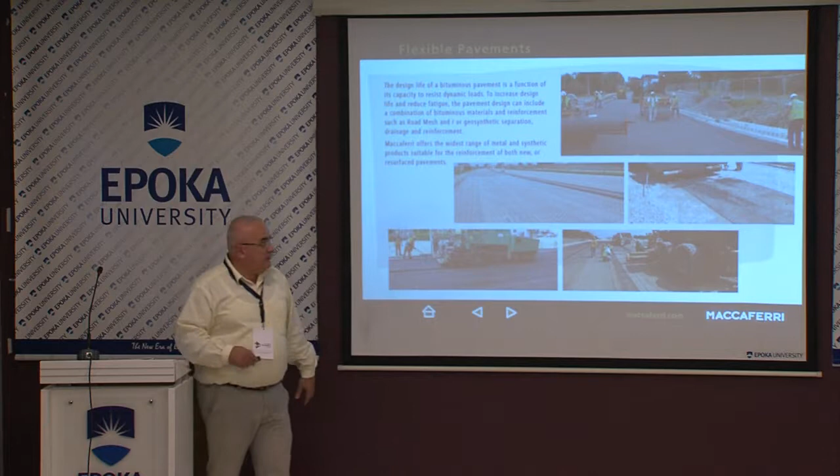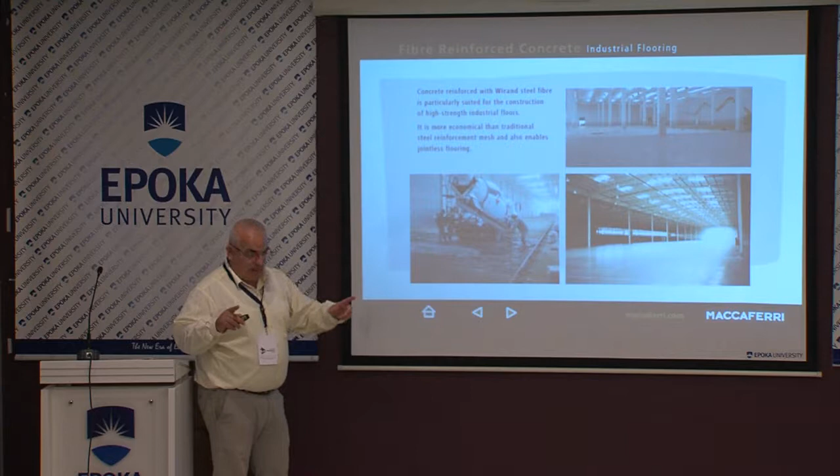It has a lot of advantages. Also steel fibers for industrial flooring - this also eliminates the need for electro-welded panels. As reinforcement, you just use the fibers.

Now I'm moving very fast because I'm taking up too much of your useful time. You can see that concrete is part of our life too, but with solutions that we provide for applications in different fields.

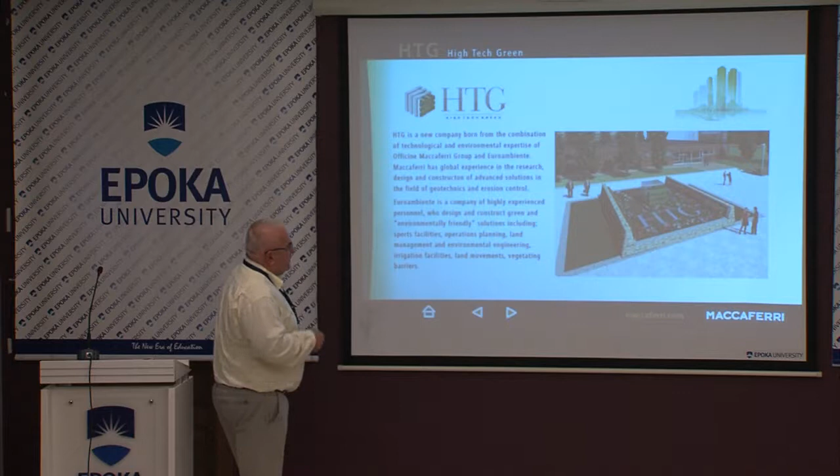We have companies that were built recently which serve the environment, and we do a lot of research for erosion control and whatever is related to the environment. Probably in the future we'll use these in our highway barriers, noise protection, and so on, because right now our goal is to build as many new roads and highways as possible, but sooner or later we'll move to barriers - I mean sound protection barriers.

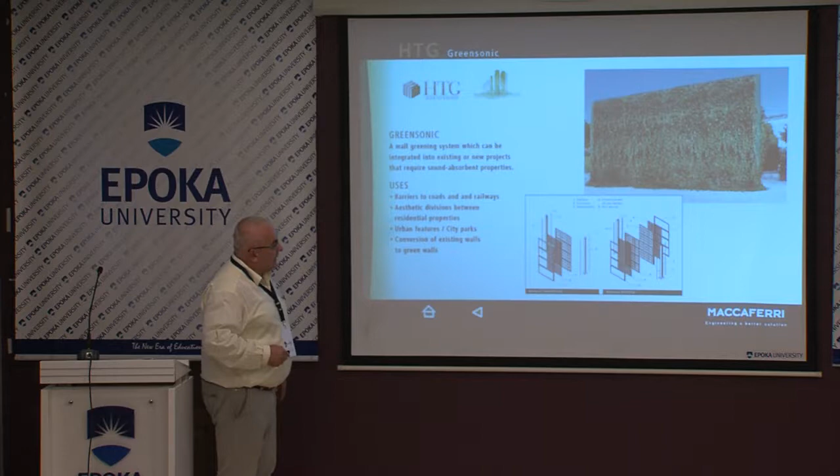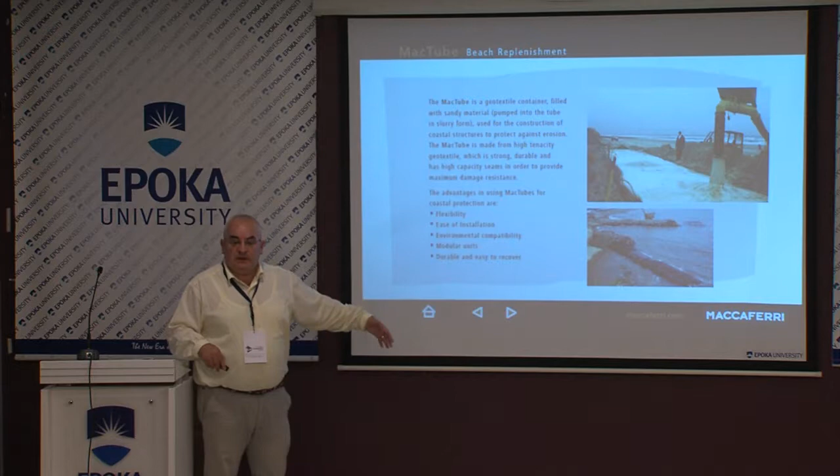Okay, so I think I covered the part about erosion on the sea. Everybody has probably heard about it through the news. It's probably very rare that any of you have started to design something or studied the problem of erosion on the seaside, the sea coast. You can imagine that hectares...